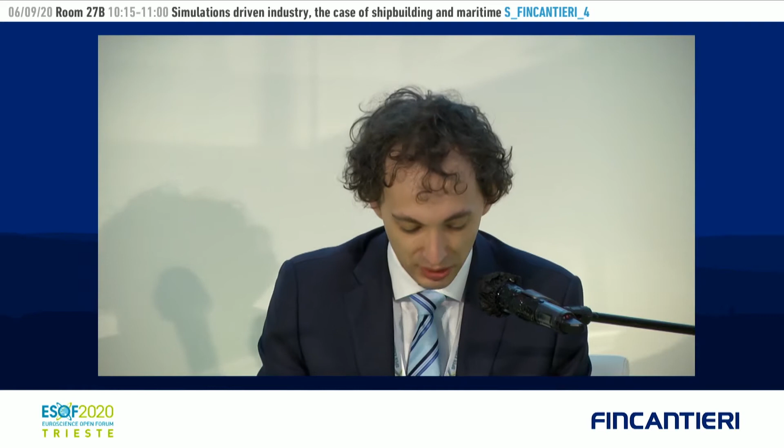Welcome to this session about simulation-driven industry, the case of maritime and shipbuilding. Here with me remotely we have two important speakers, Bas Buchner, the president of MARIN, and Luca Isgrò, the head of simulation business unit at Cetena.

Why this session, why this panel? We think that simulations are going to be important in the next decade, in the years to come, for a number of industries, and we wanted to give our view about the maritime industry, especially because nowadays high-performance computing is becoming more and more important for the designing phase and also for the operation phase of ships and many other industries.

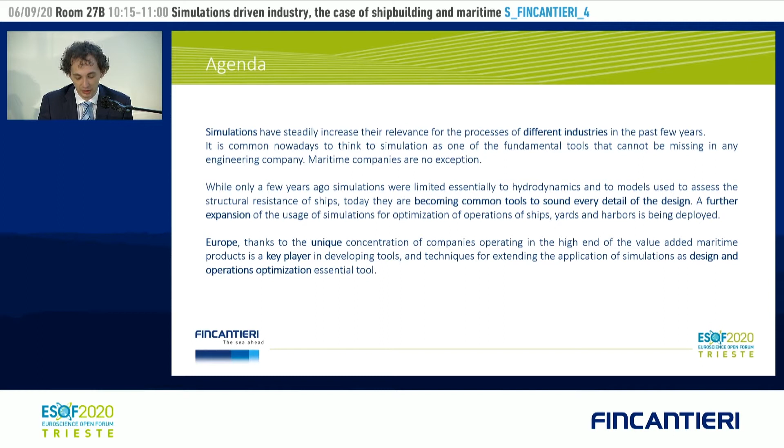I briefly introduce our guests, starting with Dr. Buchner. Dr. Buchner is now the president of MARIN, the Maritime Research Institute of Netherlands, which he joined as project manager, then went up to president. He has a PhD that he got in 2002, and was also a visiting professor at the University of Newcastle upon Tyne, and is author of more than 50 papers about simulations.

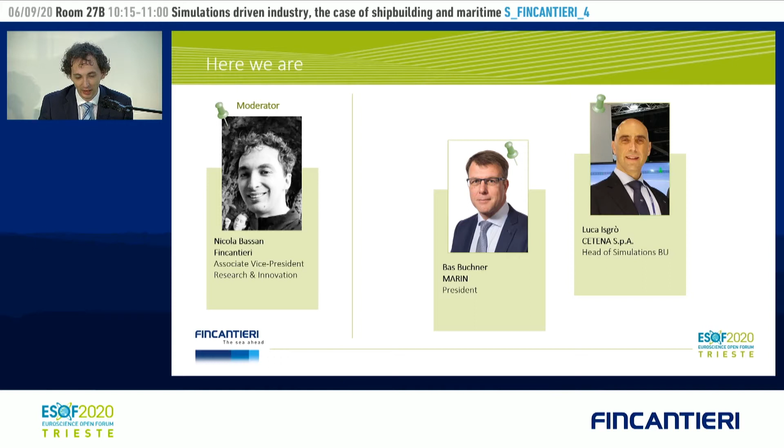And Luca Isgrò from Cetena is now the head of the simulation business unit at Cetena. He started to work as a freelance IT consultant in 1994. Then he founded his own startup that dealt with simulations, IBR Sistemi. And finally, in 2008, the startup was acquired by Cetena, and he joined the team there. Welcome to the two of you.

Can you hear me and everything works fine? Yes, it does. Yes. Yes. Perfect. I would like to start by asking some questions that I hope you will be able to answer during your talks.

And that are in the next slide, that basically will set the stage for what we are going to be discussing in the next 40 minutes. Basically, where we are, the questions that I would like you to discuss during this talk, are about the status quo. So where we are in terms of simulation usage in shipbuilding, also taking into account the historical development of the past 20 years, and which are the most promising applications that we see now.

And that we will see in 5 years from now. So what is going to be the next big thing? What are going to be the disruptions coming in our industries? And finally, since we are attending a forum dedicated to showcase the importance of science and technology for society, a final question about the key benefits that using simulations will provide to the general public and to society at large.

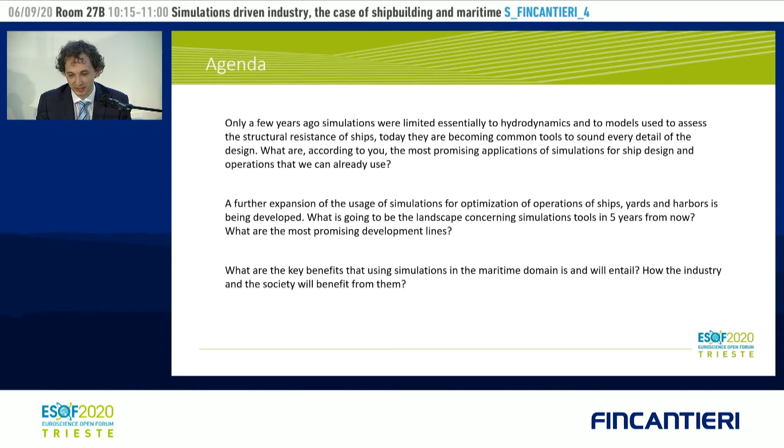So I will start by giving the floor to Dr. Buchner. Thank you very much, the stage is yours, chairman. Can you hear me? Perfectly, thank you. Okay, very good.

So hello, good morning from the Netherlands. Ladies and gentlemen, I'm very sorry that I cannot join you in your lovely city, but I'm happy we can still share our ideas about this topic, simulation-driven industry, the case for shipbuilding and maritime.

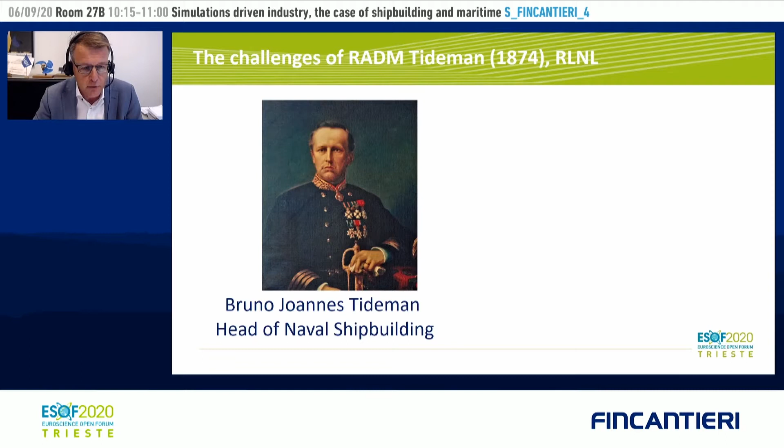And I would like to start with a bit of a historical background to show that any time needs its own tools. For that, I go back around 150 years to Rear Admiral Tideman, the head of naval shipbuilding of our Royal Netherlands Navy. And he had two challenges. The first one was the transfer from wood to steel, and also from sail to steam.

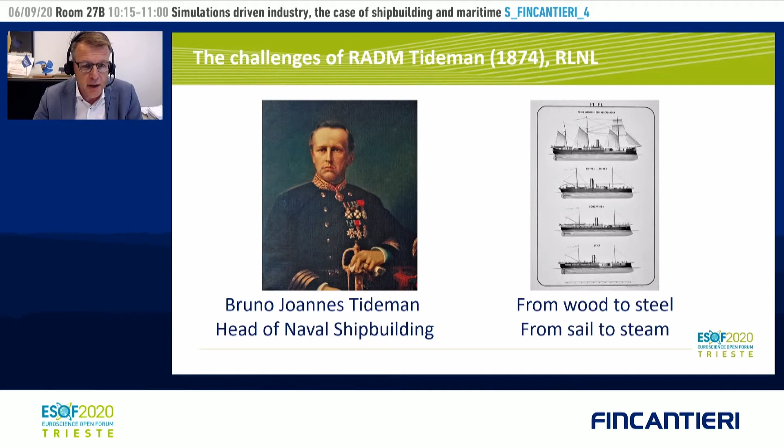And this gentleman, who was a scientist, did two important things. He started a shipyard in the Netherlands to build steel ships, we were not able to do that at that time. But he also started the second model basin in the world. And that model basin was very important to make this technological step from wood to steel and from sail to steam.

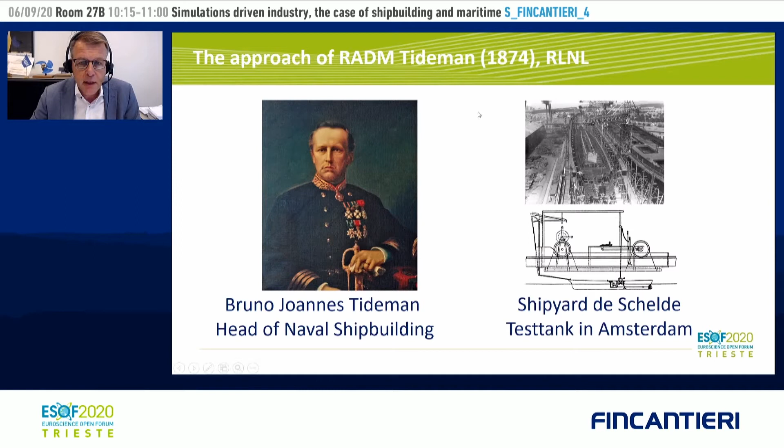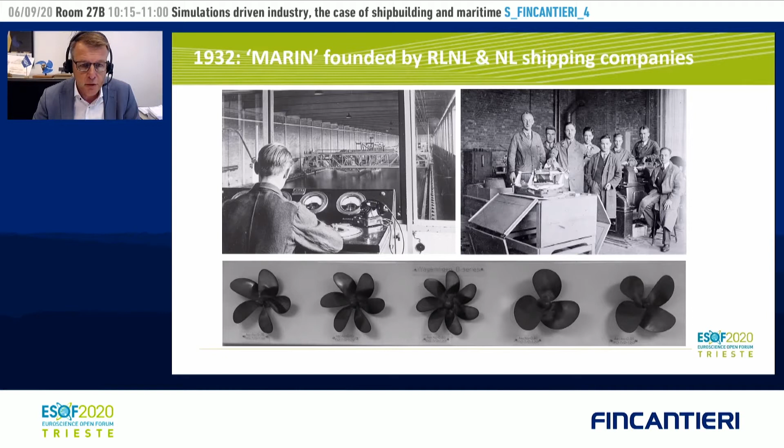And later, the Royal Netherlands Navy was one of the 5 founding fathers of our institute in the 1930s, as you can see on this picture. So they realized that model testing at that time was vital for the ships they needed. And that resulted in the present institute, which I'm heading at the moment.

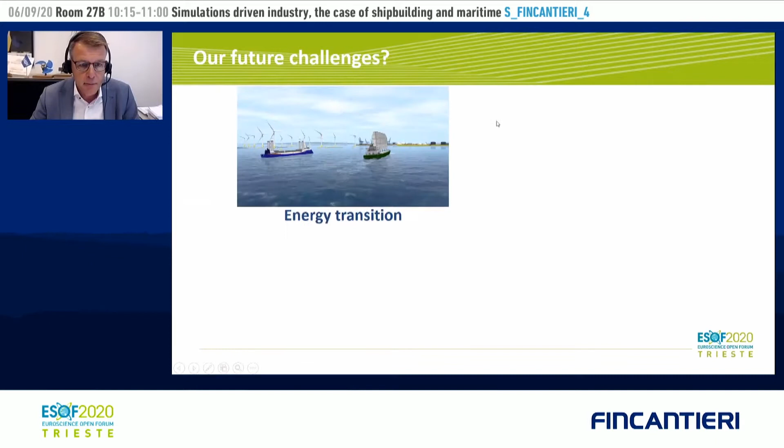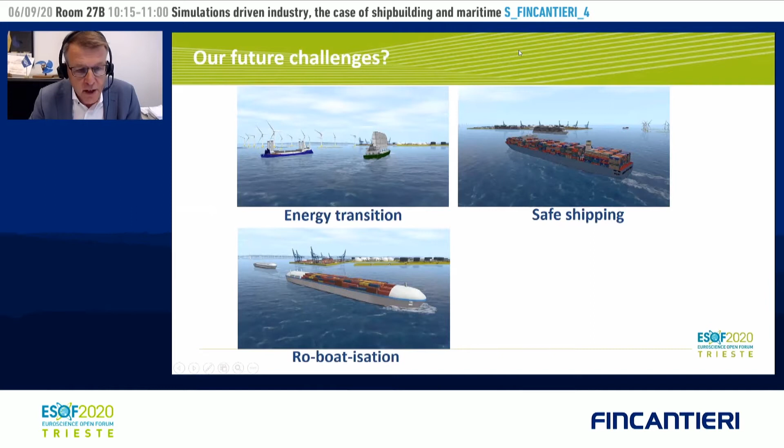And if I look to our future challenges and the tools we have 150 years later, I see the following: we see the energy transition, we see the need for more safe shipping, we see robotization, and finally the topic of the day, the digitalization. And they all work together to come to better ships.

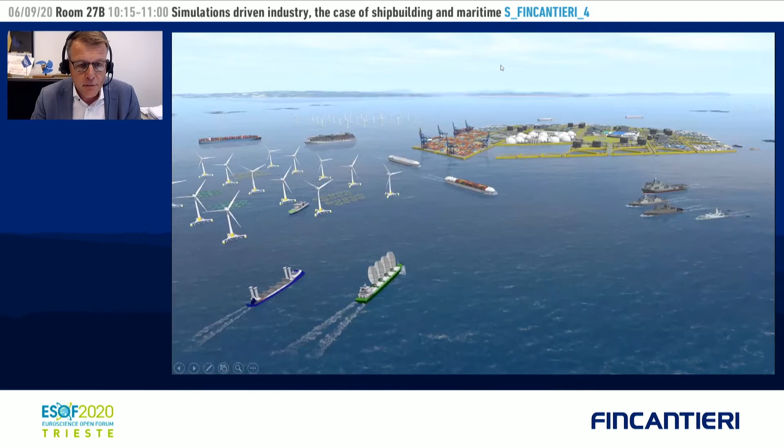And as MARIN, we made this picture of the sea of the future, and we redefined our mission by saying we want, with our technology, with our knowledge, to make ships more clean, more safe and smart, and to contribute to a sustainable use of the seas.

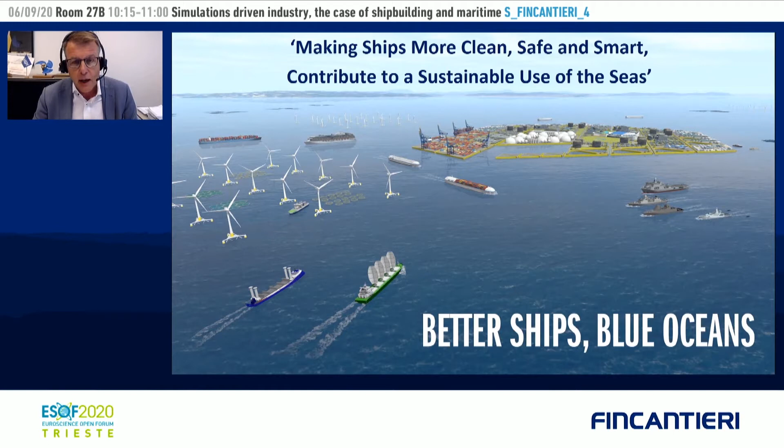And we came with a new slogan, Better Ships, Blue Oceans, because it's not just about knowledge or about digitalization. In the end, it should be relevant for better ships, more safe ships, more clean ships, and for a sustainable use of the oceans.

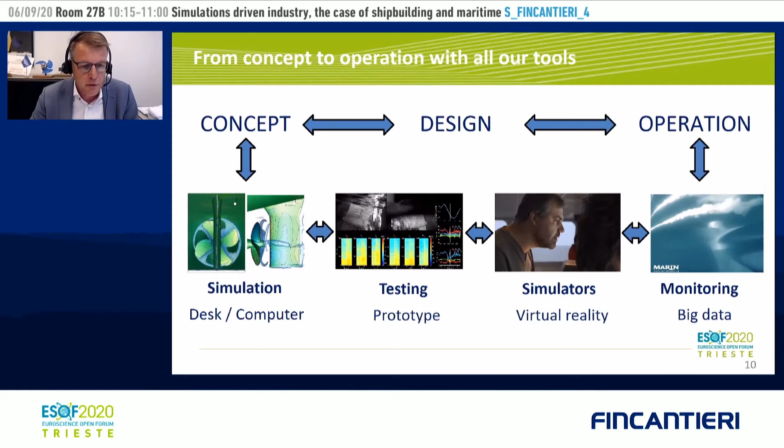And if I look to the tools we use for that, we use a combination of 4 tools from concept development to operation. You see simulations, model testing, the applications of simulators, the human in the loop virtual reality, and finally data science monitoring of real life. And we do that from concept development, from the first idea, to supporting the real operation.

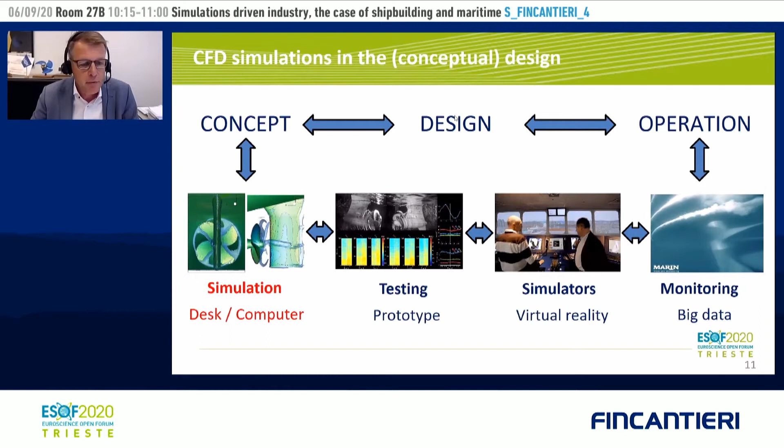If I focus on simulations first, of course we all realize that CFD has become a hugely important tool in recent decades and will be important. You see here an example of rotating propellers interacting with the hull, with the rudders and things like that. So a very important tool for design.

And nowadays we can also do that in waves. So step by step you see that simple model tests are taken over by simulations. That applies for viscous effects but also for wave effects.

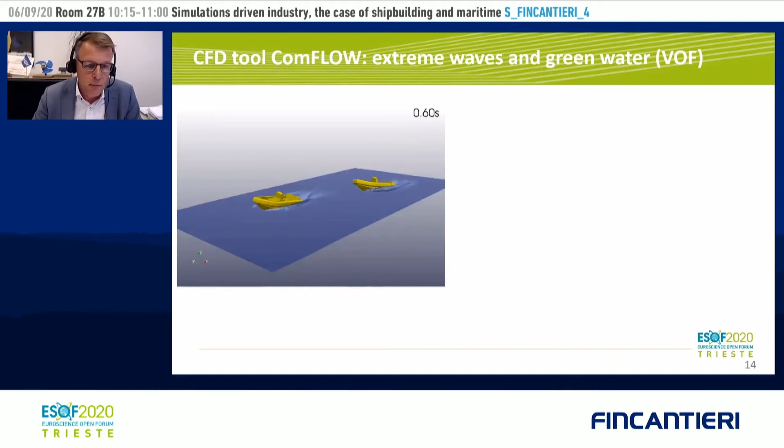You see an example here of our ComFLOW tool, a volume of fluid code for small ships, ribs in high waves, and you see the complexity. And what you see here is an example of a model test of green water on a ship.

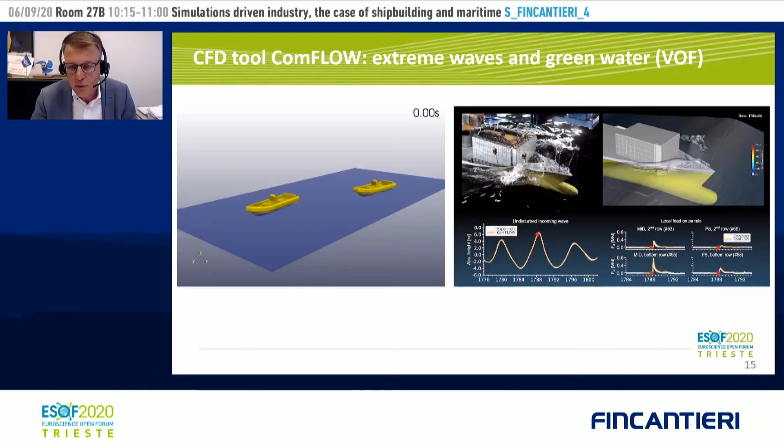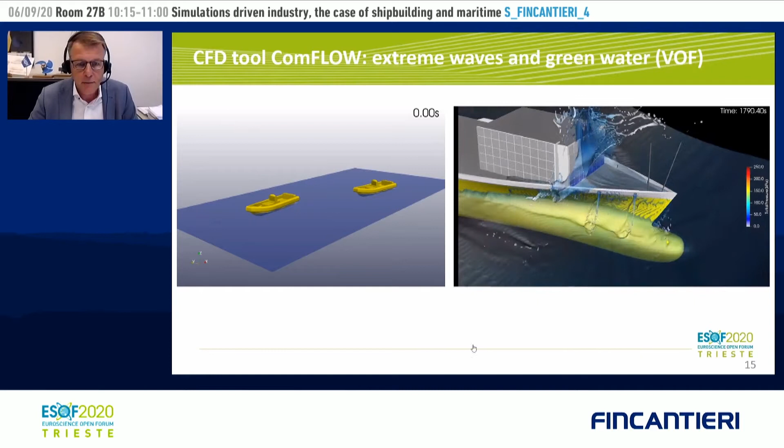On the left-hand side, you see the model test. On the right-hand side, you see the simulation. And below, you also see the measurement of the waves, the simulation of the waves, as well as the impact pressures. And then you realize what sort of major steps we made in recent years. And this is very relevant for the design.

And just to give you a final example, and that is really the strength of simulations, is that CFD helps us to understand the design better. This is a CFD calculation of a submarine, and this analysis was there to check the inflow, the load on the aft rudder as a function of the inflow.

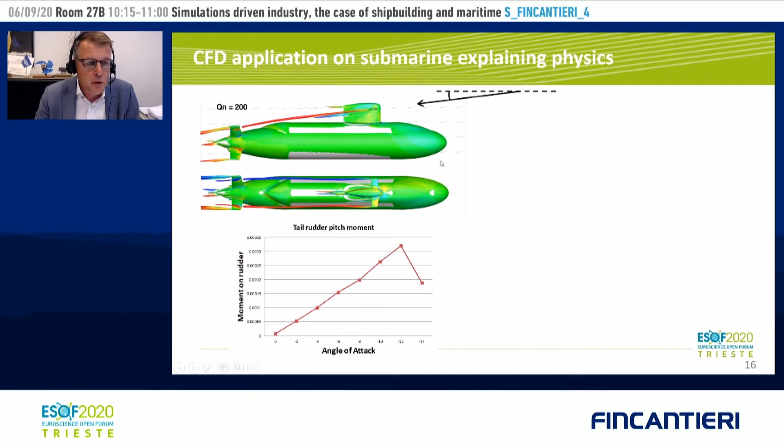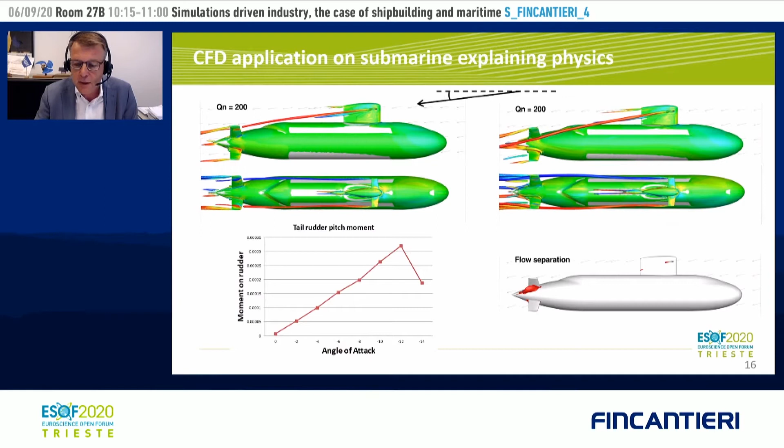And what they realized when doing this analysis, is that when this angle of attack was increasing, the moment on this aft rudder was at a certain moment dropping off. And then by CFD they realized, when looking to the vortices that came from this control plane on the sail, that it's actually interacting at the stern with the rudder, and that gives flow separation, explaining the behavior. So the detailed flow analysis in CFD helps us to come up with better designs and operations.

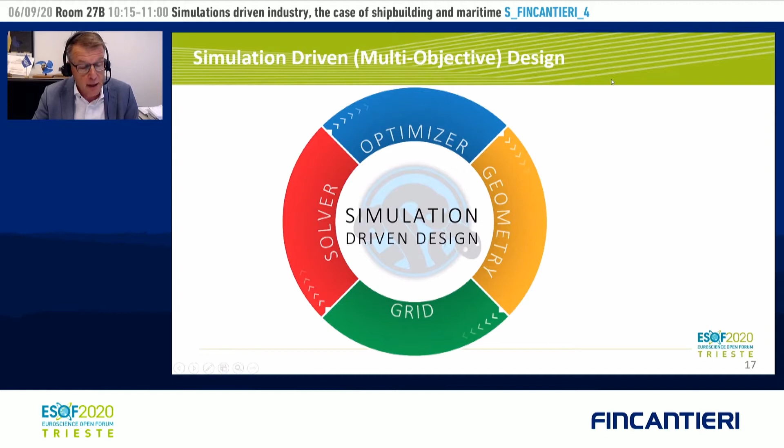But there's one other step I want to discuss, and that is CFD is not just replacing model testing, and model testing will be there for a long time, but it also helps us to optimize ship design. And that is the case of the simulation-driven design, because we can then look to multi-objectives, not just one loading condition at one speed, but many speeds, many loading conditions, in waves, etc. So we can use these tools for optimization.

And for that we need geometry tools, existing tools which you can add with your own modifications. You need gridding and you need solvers. And in this type of optimization tools you can combine CFD, for instance, with time domain or potential flow codes.

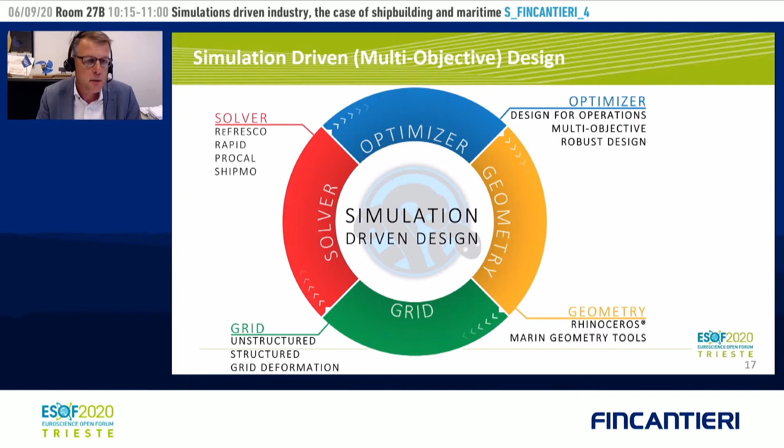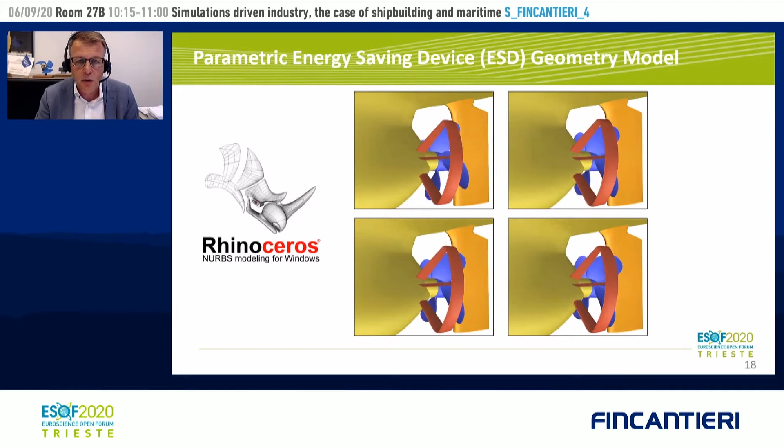To give you an example, this is work our colleagues have done on the optimization of an energy saving device. By parametric optimization, of the size, the pitch angles, the camber, we did variations which in the end resulted in a large cloud of possible design options, and using a Pareto front you can then determine your optimum.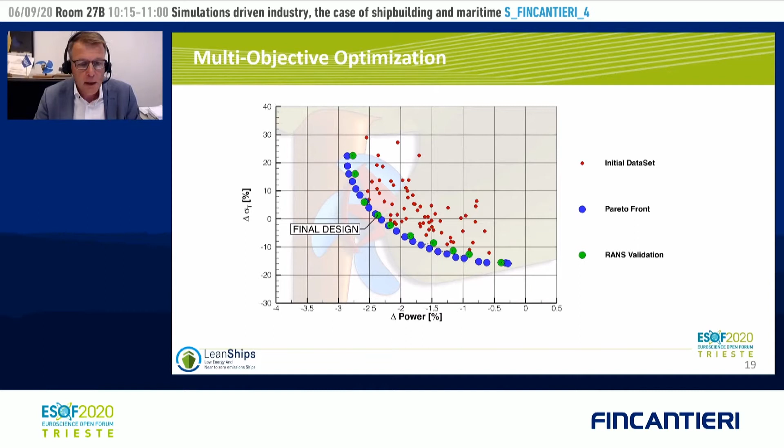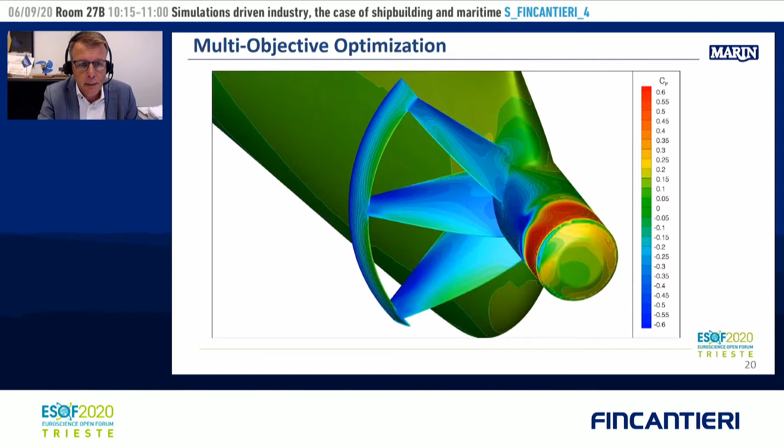And that is very important, and here you see the same variation in CFD. So by parametric variation you can optimize the system, and in this case we were able, for a large range of applications and conditions, to achieve a 4% reduction in power consumption. So that's one thing, CFD.

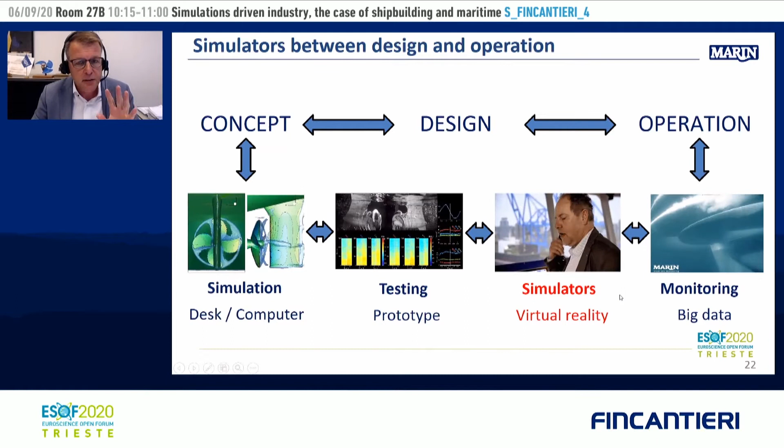The other thing I would like to discuss with you is the topic of the application of simulators. And simulators are typically between design and the operation. Just to give you an example, this is a project we did a few years ago for an offshore oil and gas company, where they had to install a very heavy tens of thousands of ton deck on a spar structure.

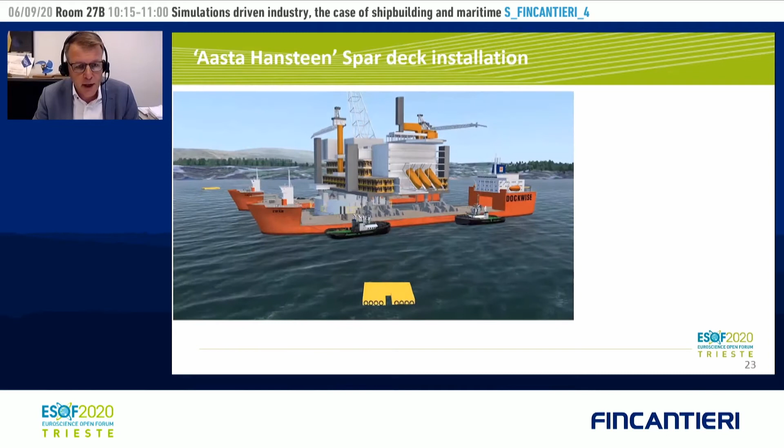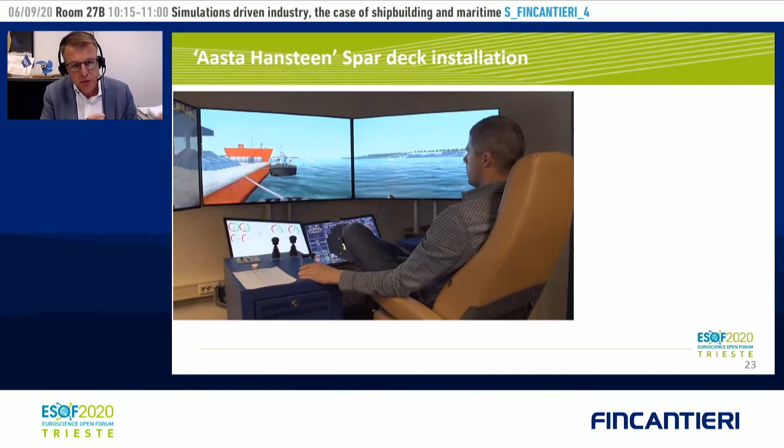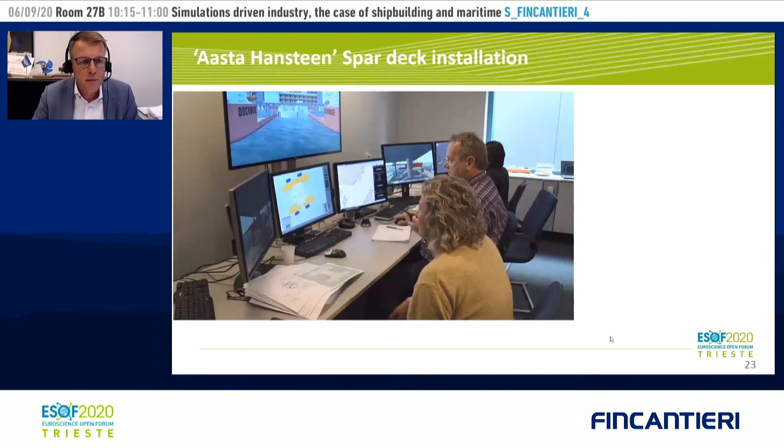Simulations allow you to bring the engineers together with the operational people for mission rehearsal, so that people can talk about their operation, they can optimize the operation. So what you see here is the simulation at MARIN Simulators, and this is in the end how it happened. And we got a very positive response back from our client.

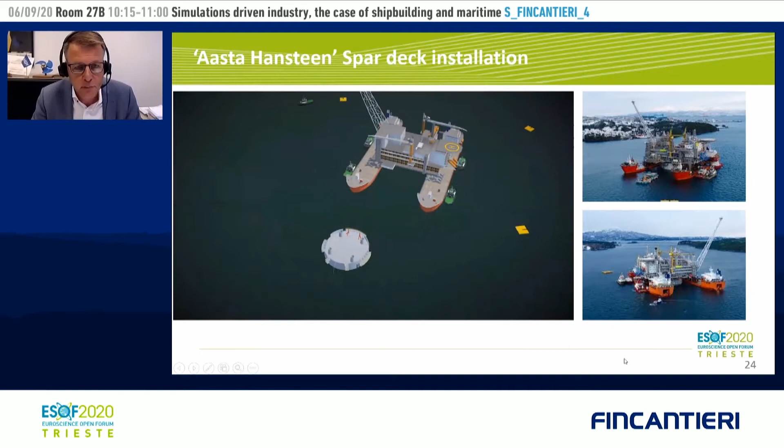They actually said, yes, we really changed the approach based on the simulations, and that made it safe and efficient. Another recent example is the HMS Queen Elizabeth, the large aircraft carrier of the Royal Navy.

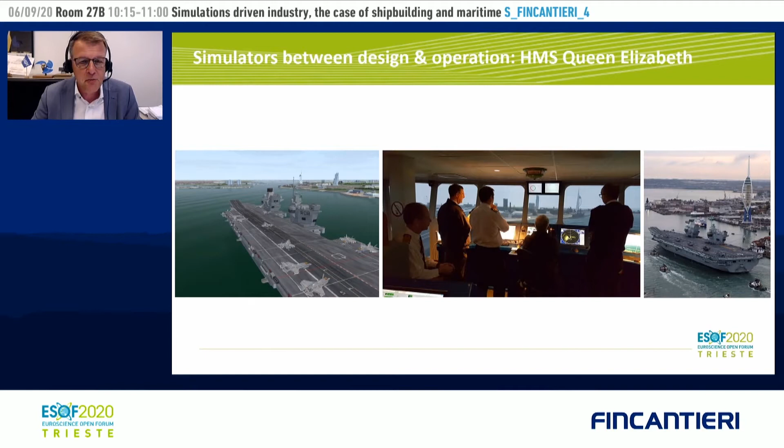And before they entered the port of Portsmouth for the first time, the bridge team, the pilots, the commanding team came to MARIN and did this whole operation. And finally they were there, and they did it safely with thousands of people on the quay. And it's very nice what the commander, you see him here in the center, said at the end.

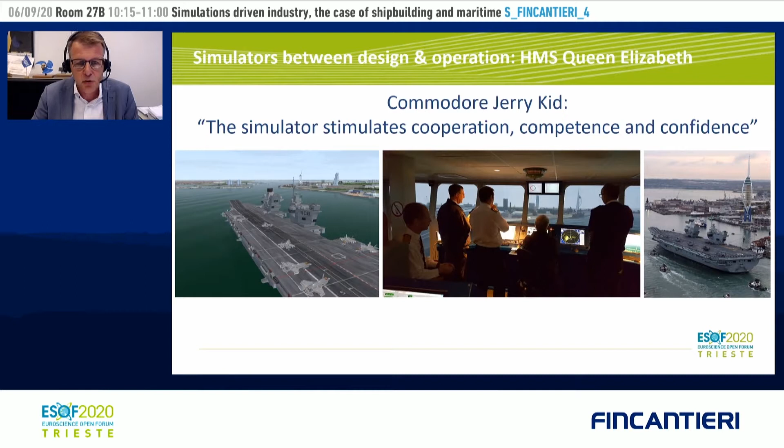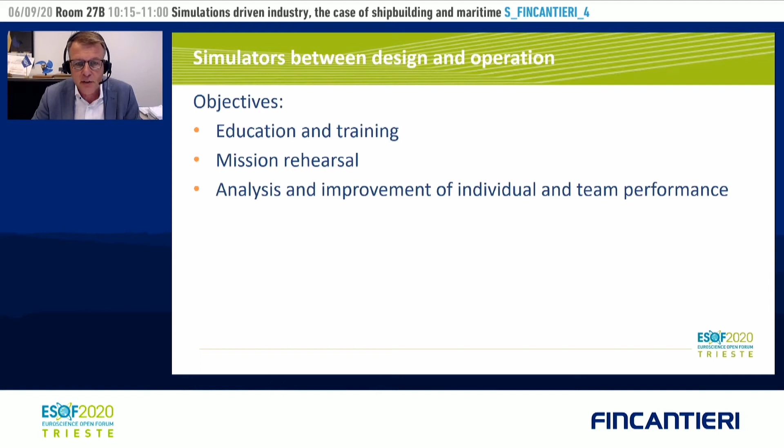It's a Commodore, and he said the simulator stimulates cooperation, competence and confidence. And I think that is a key to the use of simulators between design and operation. So if you look to design and operation and the use of simulators, we see there are three objectives for simulator application.

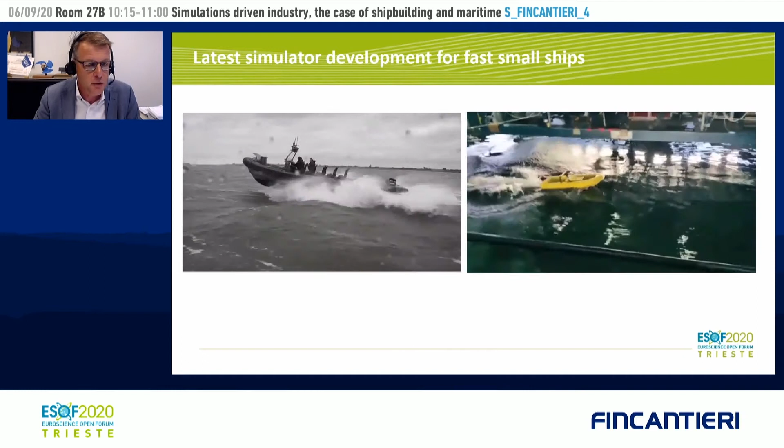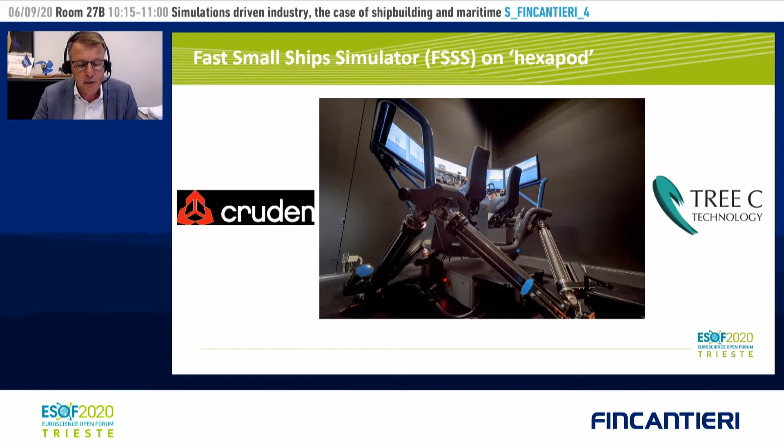Education and training, mission rehearsal, and analysis and improvement of the individual and team performance. And our latest development in this field is focused on small ships, which have very large motions and heavy loads on the team. To limit the loads on the people and develop a tool for training, we developed this moving simulator. You can see it here in this movie, a Dutch marine sailing in heavy waves. This type of simulator allows these people to build up their training, to do things they can't do in reality safely.

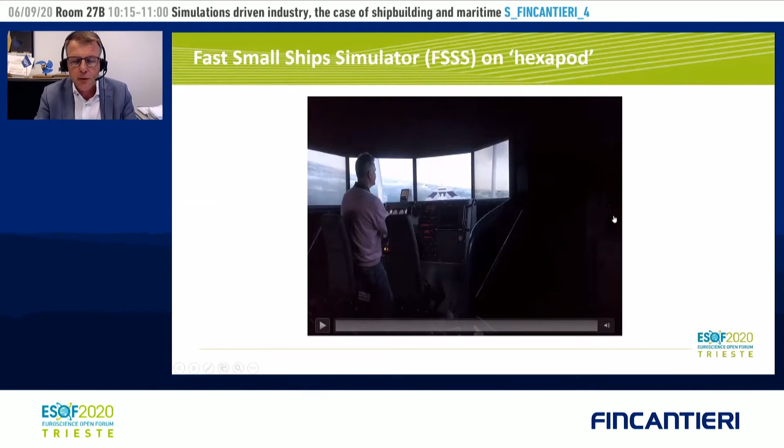And then apply this type of technology for a safe operation, but also for design. So if I go back to that, you see here this line of simulations, testing, simulators, and reality. And here you see another example where I show this, in this case still the simulator applications between concept and design.

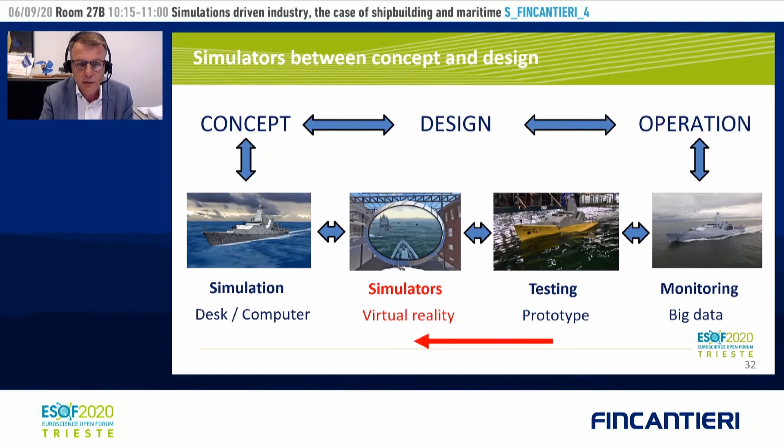What we see nowadays more and more is a shift towards an earlier application of virtual reality in simulators, in the conceptual design, between concept, development and design. One of the examples is this: virtual prototyping. This is a ship we were testing, model testing, but they brought onto our simulator the DP system, the real hardware.

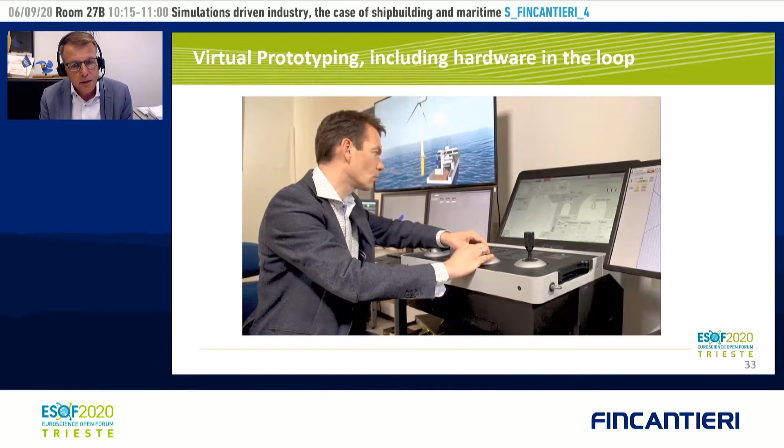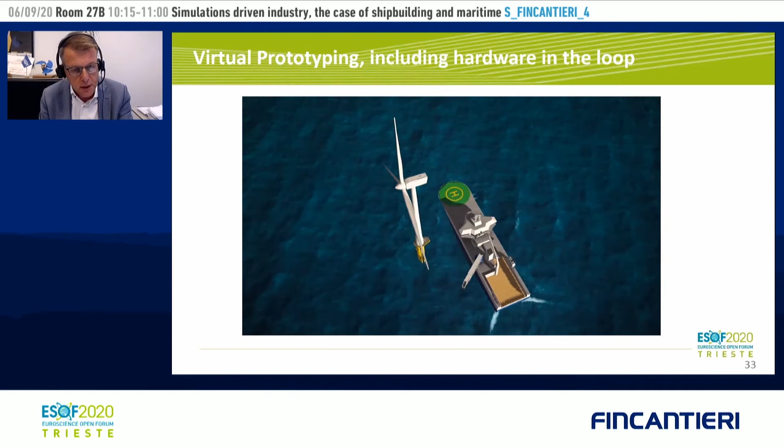They brought in the system to bring people on board from this ship onto this wind turbine, and this all in a closed loop simulation allowed the designers to optimize the design.

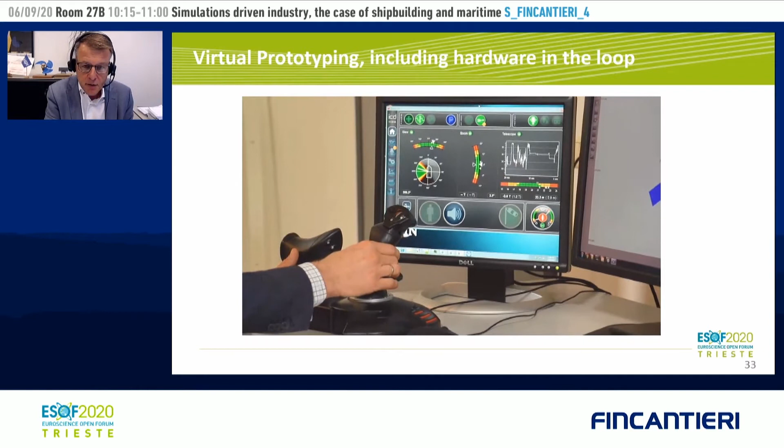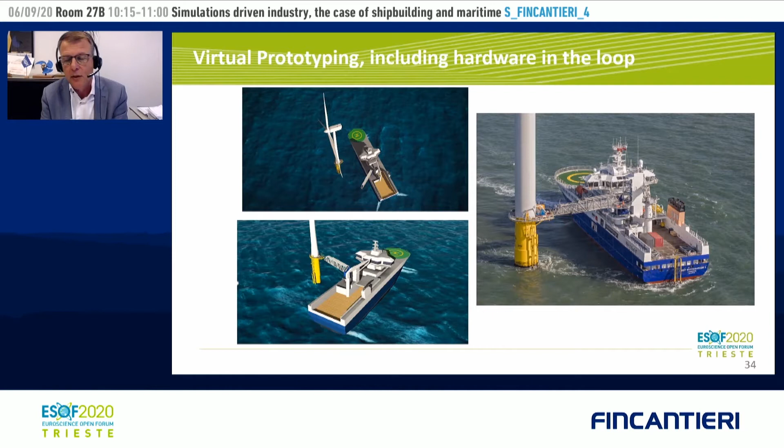But on the other end, this simulator is also available now for training of the crews. Now you see here the simulation, and here I recently found, on the right-hand side, the real thing. So on the left-hand side you see the simulation, on the right-hand side you see the real thing, and they are very close.

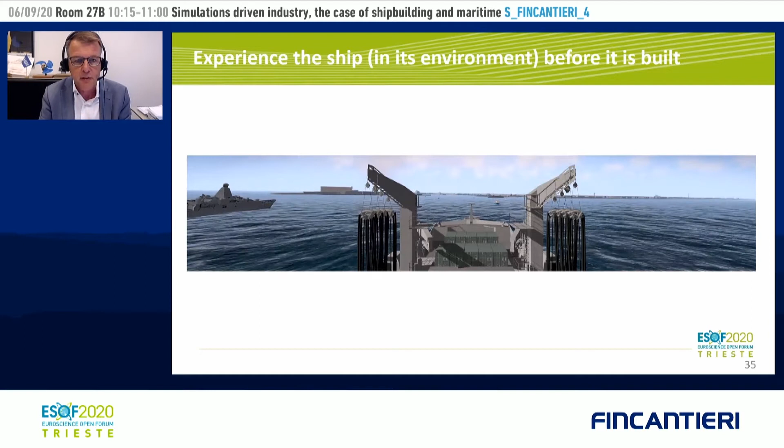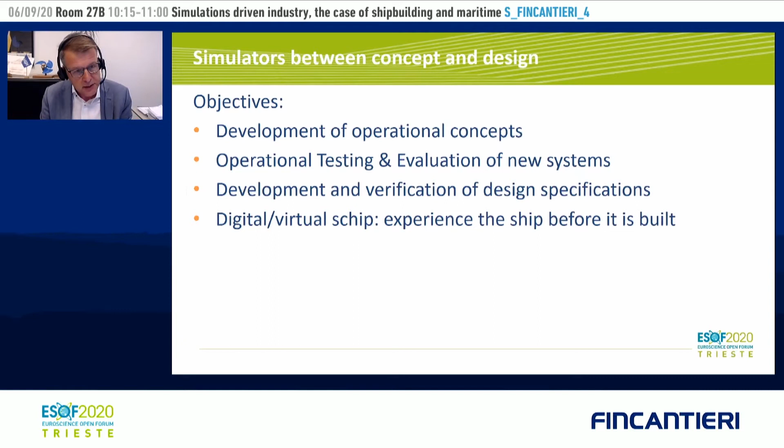So the simulators are also between design and concept. If you look at that, the objectives are the development of operational concepts, fleets, operational testing and evaluation of new systems with hardware in the loop, the development and verification of design specifications - what does the number actually mean if you do an analysis - and experience the digital or virtual ship before it is built.

And to support that development, we are at the moment at MARIN developing a new 7 Oceans Simulator Center. It is a simulator center with spherical simulators so that you can look around, up and down, fully around. The whole objective of this simulator center is to come to safe and efficient maritime operations, bringing people in the loop and confronting them with the sea, but also with the behavior of their ship.

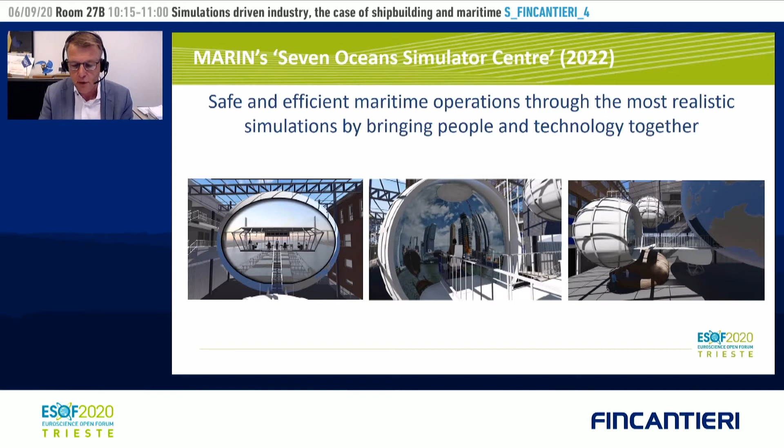And these will not just be normal bridge simulators. We will have virtual mixed reality using haptic gloves, motion capturing, treadmills. So we are stepping on board of the ship in a virtual manner to make sure that the crew can work with it, but also work with it in complex conditions and talk to the designers.

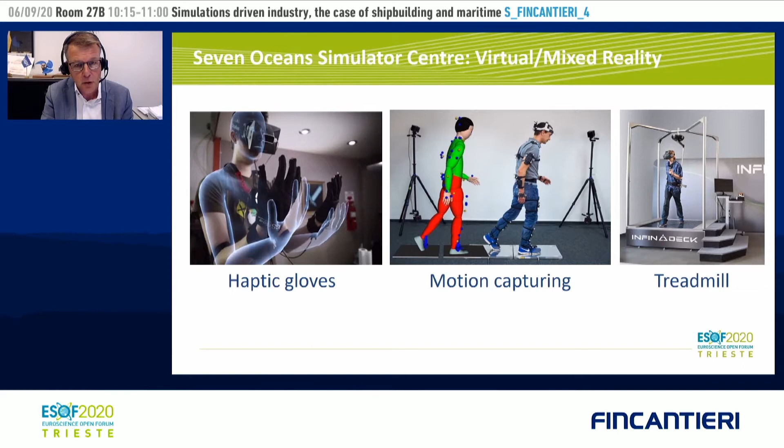So if I summarize, MARIN's mission is cleaner, safer, smarter ships, sustainable use of the seas. We do this with all our tools from concept to operation. We support this with our knowledge about the ship: resistance and propulsion, stability, seakeeping, maneuvering of the ship. We have chosen 4 spearheads: zero emission, blue growth, operations and human factors, and autonomy and decision support.

But the key enabling technologies of computational fluid dynamics, time domain simulations, and data science are all supporting this simulation-driven design and operation. And my final note is the following: I think in the next 5 to 10 years we make another step. We all talk about digital twins, of course, but still we think at the moment mainly from a model we make, an understanding of physics that brings us to reality, and then the data is the feedback. I believe that in the next decades you will see that the data-driven methodology, data itself, becomes a very important factor in the modeling of our future designs.

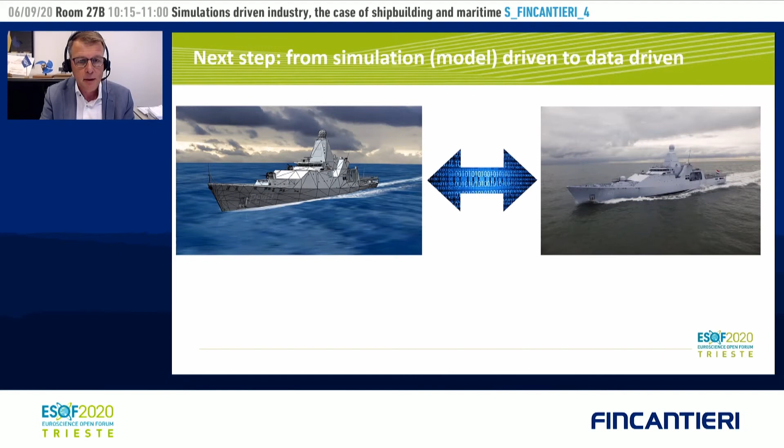Thank you very much. Thank you, Bas.

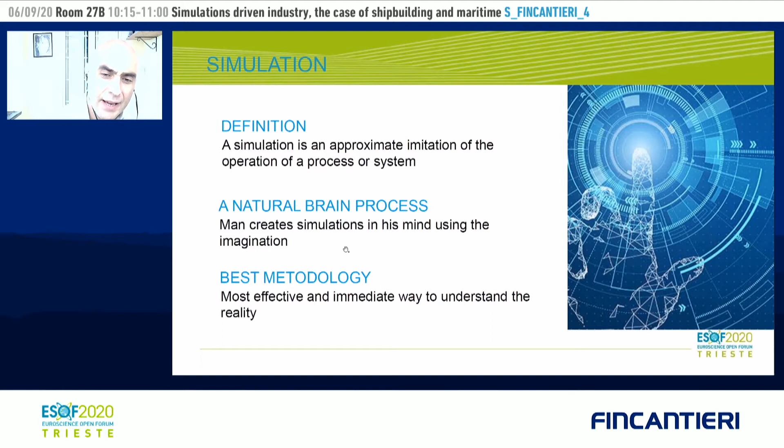For this reason, it's very easy to understand the concept of simulation. In fact, simulation often becomes the most effective and immediate way to understand our reality. There are many kinds of simulation, but today when we talk about simulation, we refer to maritime real-time simulation that can be applied in different applications and fields.

We identify four main applications: training systems for maritime and naval applications, test bed, which means using the simulation system to test, verify, and validate equipment, entities, and procedures, maneuver simulators for port assessment, and marketing and promotion, where the simulation system becomes the most simple way to show and present a product.

The simulation system for training has a lot of advantages. Often, sea operations can be dangerous. Using a simulator allows, for example, facing a stormy sea or making a mooring with 50 knots of wind, or having a fight mission against other entities without any kind of risk.

Obviously, the cost of a simulator operation is infinitesimal compared to a mission on the real ship. With a simulator, you can do joint missions in very complex scenarios, and it is possible to do any kind of exercise to cooperate, compete, or fight with other entities involved in the same scenario.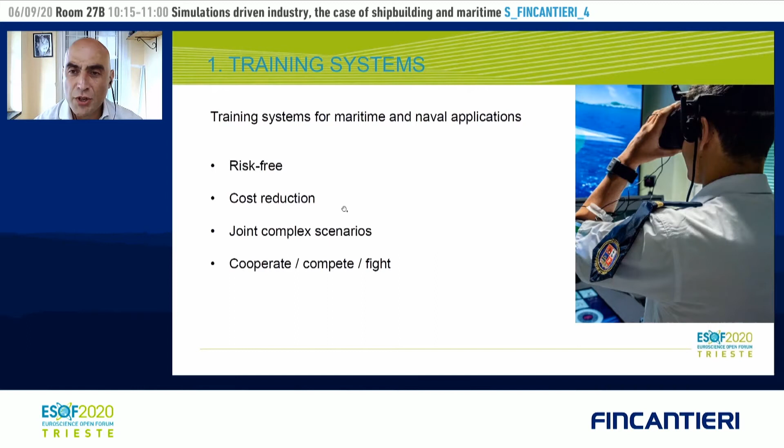The use of simulators for test beds allows verifying and validating different kinds of equipment, entities, or procedures. For example, we can do preliminary tests of a new kind of radar, reducing the number of sea trials and relative costs. Or we can test the procedure to defend a specific port area. Another example is using virtual reality equipment to test the ergonomics of a new concept of a ship command bridge.

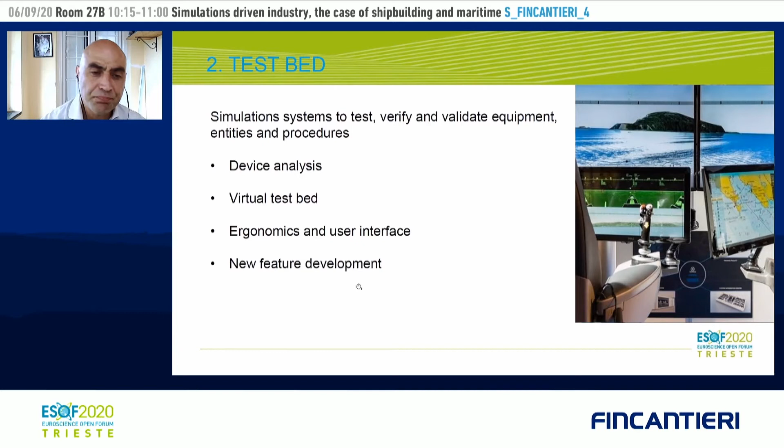Cetena has used the simulation system for port assessment for more than 20 years. We can check the compatibility between ship and port. For example, it's also possible to check the compatibility between a new ship under construction with a new project of a new port or a specific dock.

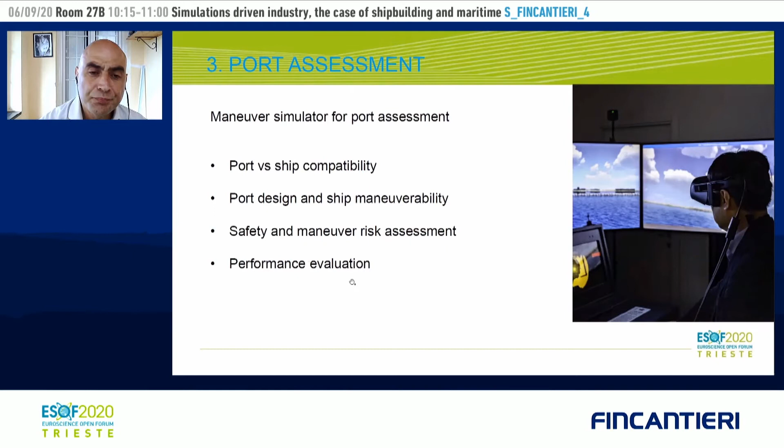Using the simulation system for marketing and promotion has a lot of advantages. It can be a very high impact display. For example, Fincantieri brings a very big bridge simulator to various exhibitions around the world to attract visitors and give them the opportunity to test the ship or equipment. A very big added value is that the customer can see and touch the product even when the product is not available or it's only a project.

To realize our simulation systems, we developed MANTA, Multiplayer Advanced Networking Training Architecture. To tell the truth, we started with the logo and the name, and afterward we searched for words for a likely acronym. But MANTA is a suite of software and hardware products to realize a very large kind of simulation system.

MANTA is developed respecting the latest generation standards. It is designed to be modular, reconfigurable, expandable, and interoperable. It has an open architecture that allows connection to other simulation systems in compliance with all distributed simulation standards, such as DIS or HLA. It is also ready to be connected to real equipment using industrial standard connection systems, like CAN bus, or specific protocols such as NMEA, Asterix, and so on.

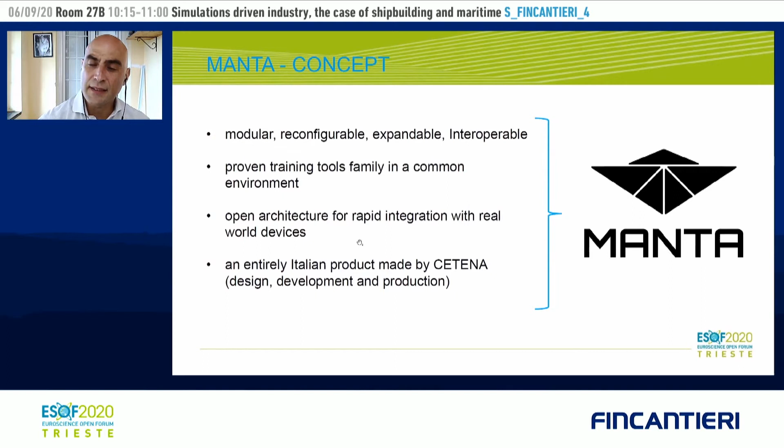MANTA is based on the most advanced commercial hardware and software, and it is continuously updated in physics algorithms, computer graphics, and virtual environments. It's important to emphasize that Cetena performs the sea trials of all ships produced by Fincantieri. All the data collected during the sea trials power our physics engine, which is continuously updated and validated.

MANTA is also used for Cetena consultancy and services activity, like for example, the port assessment.

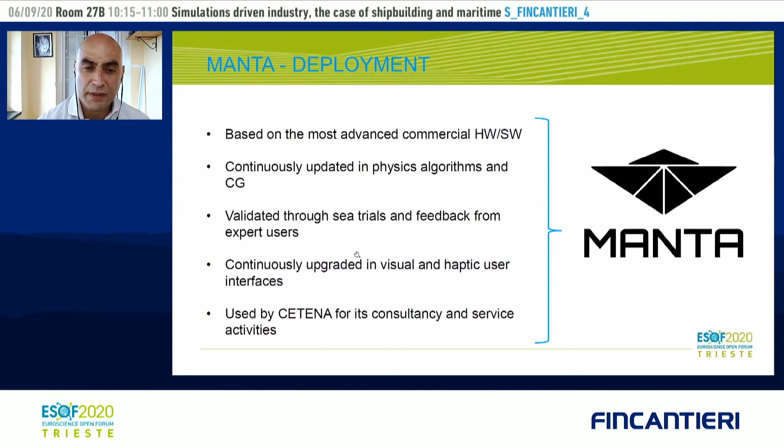With MANTA, it's possible to simulate any kind of entity, for example big ships, fast boats, helicopters, underwater vehicles, and any kind of equipment like conning, radar, electronic chart, communication, etc. Summarizing, it's possible to simulate any kind of entities and equipment used in the maritime domain.

MANTA allows building many different solutions, from desktop to full mission simulator, that can work individually or connected in a multiplayer and multi-role simulation.

Desktop solution is mainly used for individual use. Console solution is used to simulate a specific console or equipment. Full motion solution uses the 6 degree of freedom motion platform to recreate the same movement of the simulated entities.

The full bridge solution is used to simulate all activities of a common bridge ship, and the full mission solution integrates in the simulator all main naval ship roles, conduction, propulsion, and combat systems.

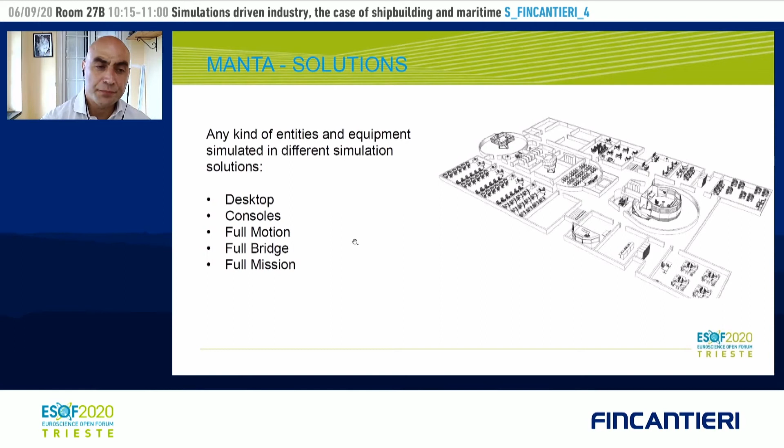Now I show you some of our case histories. One of our best military customers of training simulation systems is the Italian Navy, which uses different kinds of simulators. On the left, you can see a classroom for individual navigation training. And on the right, you can see a full mission simulator that integrates also the machinery control room simulator and combat system simulator.

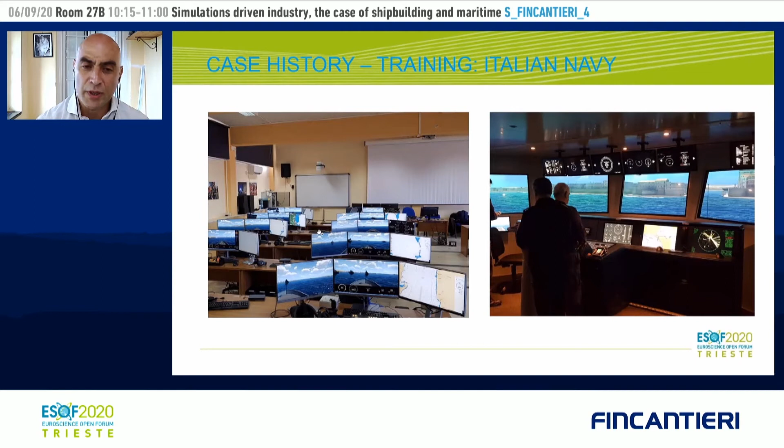Another example of a training simulation system is the full bridge STCW certified simulator that we realized for Italian Shipping Academy, located in Genoa.

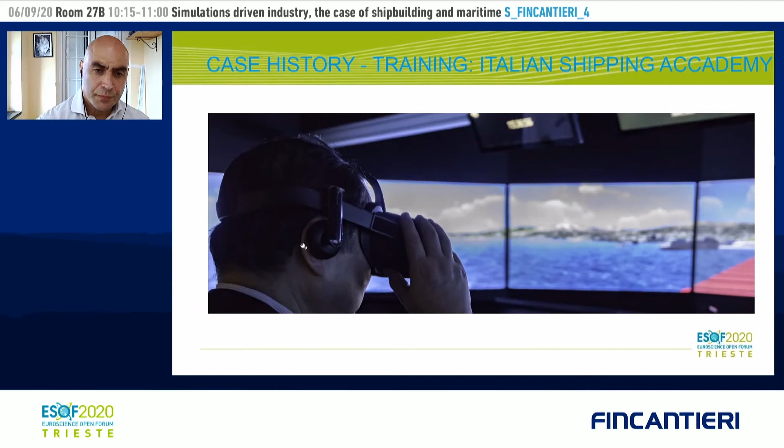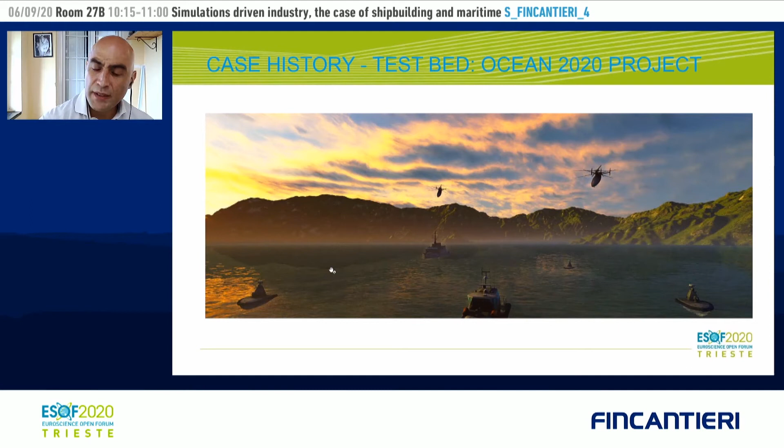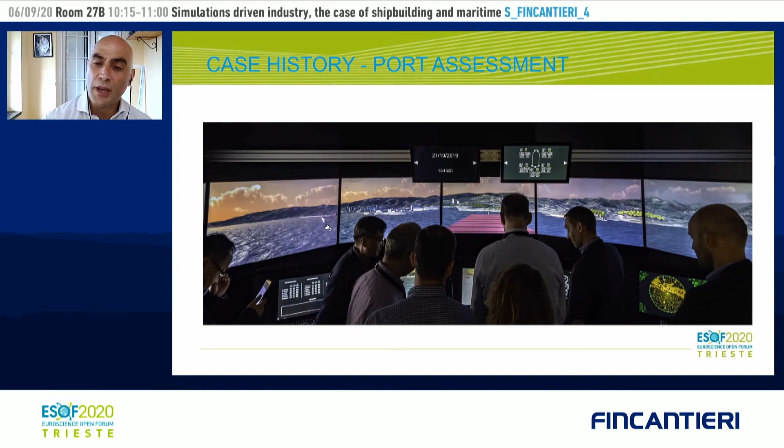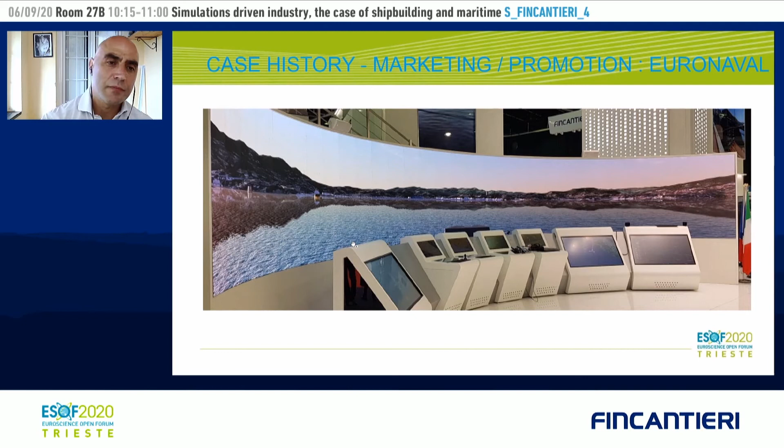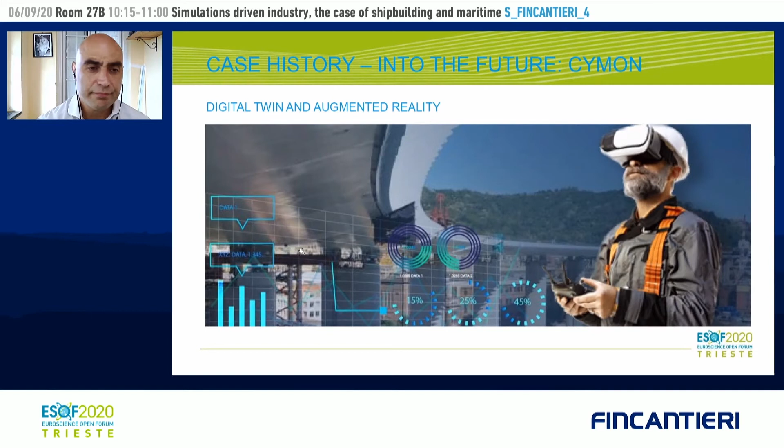Since we have another, let's say, final 10 minutes, I would like to ask a final question to both of you. That was basically a summary, a wrap-up of what you told us. You showcased a lot of important applications for the maritime industry for simulations, and you also hinted at some of the benefits that those simulations will have for society. So, for example, we heard about simulating for creating ships that are becoming greener, or simulating for optimizing operations and therefore ensuring higher safety both for the crew of the ships, but also for the people operating the shipyards and so for the cities in general. I would like you to elaborate a bit more about this, because I think that both of you hinted at the fact that in the next decade, in the near future, simulations are becoming more and more important. Therefore, we can also expect, as a society, more benefits from the fact that shipbuilders, ship operators, and also yards will use simulations for their day-to-day activities. What is your take about the benefits that society will gain in the next decade from this continuous improvement in the simulation industry? I will start again with Dr. Bruckner, and then I'll move to Luca.